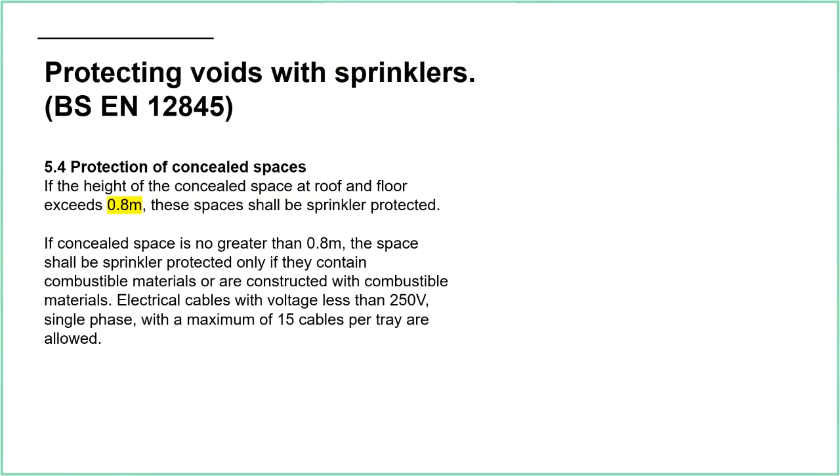So 0.8 meters, that is the magic number, and I've put that in bold here. 0.8 meters, 800 millimeters, that is the key number. It says, if the height of the concealed space at roof and floor exceeds 0.8 meters, these spaces shall be sprinkler protected. So that's a nice, easy, black and white option. If the void is greater than 800 millimeters, then sprinkler protection is required.

If the ceiling void is less than 800 millimeters, then sprinkler protection may be required. So it's important to get that distinction. It's not a case that less than 800 millimeters you don't have to sprinkler protect, but you may not, depending on a few factors. So we have no combustible materials, and that's a bit of a grey area. The standard does not tell you exactly what is a combustible material and what isn't, or whether a little bit of combustible material counts. We don't have that kind of detail.

I guess a fire engineer would be qualified to answer that, but somebody has got to make a decision as to whether or not there are combustible materials in the void. From a sprinkler contractor's point of view, I guess they would just put a note on the drawing: I've not put sprinklers into this void because it is 700 millimeters, but this is on the basis that there's no combustible material. And obviously the voids need to be constructed with non-combustible materials as well.

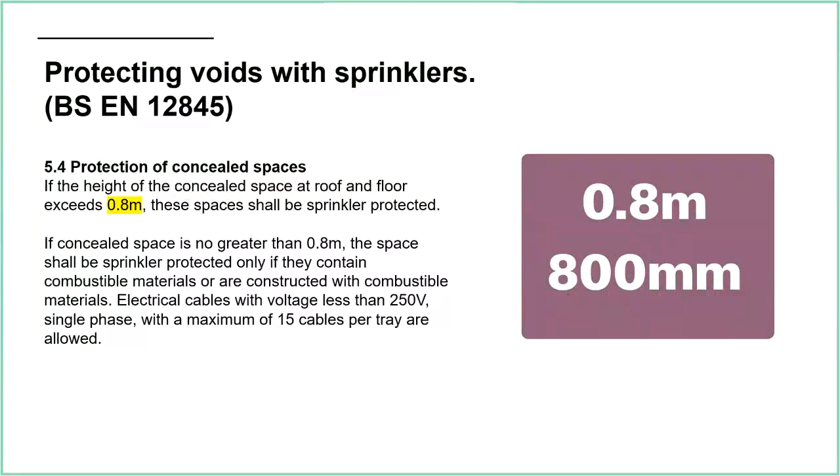There is a specific note here about electrical cables. We are allowed some cables within the void without sprinkler protection being required: less than 250 volts, single phase, maximum 15 cables per tray. So very specific there in terms of the number of cables per cable tray. But the main takeaway from this presentation is 0.8 meters, 800 millimeters. If the void is up to 800 millimeters, then sprinkler protection may be required. Anything over 800 millimeters, sprinkler protection is required.

A bit more information can be found in the technical bulletins. So again, I have explained this before. We have the British Standard, and then we have the technical bulletins, and those two documents added together make up what is commonly referred to as the LPC rules or the LPCB rules. So technical bulletin 230 talks about protection of roof spaces, floors and ceiling voids.

So the word voids does crop up here. And it is basically the same rule, so it's still 0.8 meters, but there's a little bit more detail that's been added here. So up to 0.8 meters shall be either sprinkler protected or compartmentalised by vertical cavity barriers, which shall enclose areas no greater than 250 square meters.

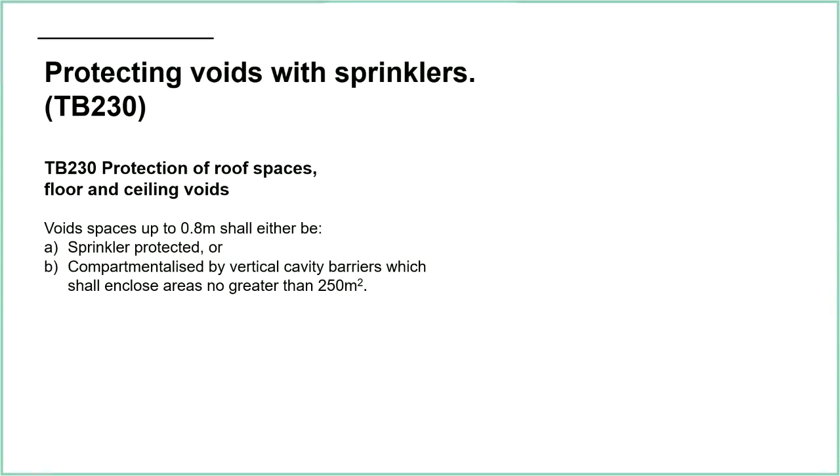So compartmentalisation is not actually mentioned in 5.4, although I think that it would be required under other regulations, non-sprinkler regulations in terms of construction. But here it's kind of spelt out in black and white. We need to compartmentalise it. Barriers no greater than 250.

What is a cavity barrier? Well, in the actual technical bulletin there is a little definition there. A separating element that resists the passage of flame, heat and fire gases for a period of 30 minutes. And there's a British Standard, which obviously gives you more information, BS 476-22. But yeah, it's a 30-minute fire barrier. So that's up to 0.8 meters.

Void greater than 0.8 meters shall be sprinkler protected. Again, similar kind of idea. And then where you have voids where some of it's more than and some of it's less than, again, there's a note here that deals with that. So either you sprinkler protect throughout, common sense. You can protect the lower depth and the higher depth, all sprinkler protected. Well, that will obviously work.

Or you can compartmentalise so that you've got some areas that are greater and some areas that are less. You don't need to protect the areas that are less, but you do need to protect the areas that are more. So again, that seems common sense to me to deal with that issue where you've got varying void depths.

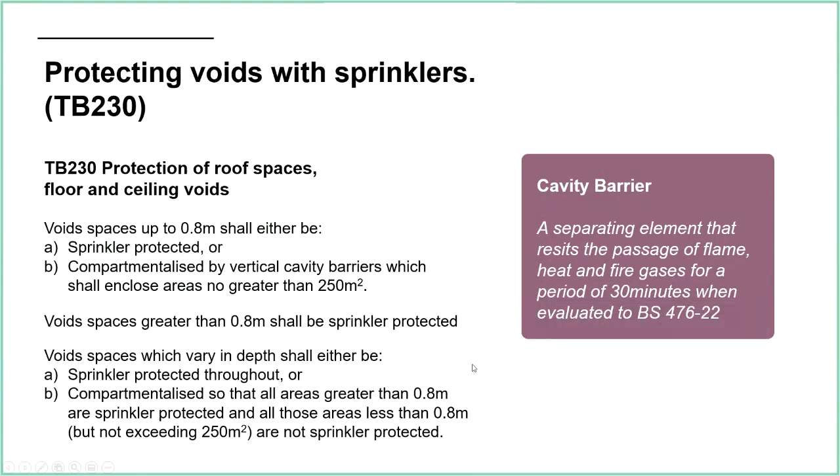Another bit here, continuing on 5.4. What's the actual sprinkler coverage? So the protection in the concealed space shall be light hazard when the main hazard is light hazard. I.e., if you've got a light hazard building and you have a ceiling void which is sprinkler protected, then the ceiling void protection shall also be light hazard. Light hazard is pretty rare actually these days, so much more likely to have ordinary hazard.

So the protection in the concealed space shall be OH1 in all other cases. And just a reminder, that means we want 5 millimeters per minute of discharge, a 72 square meter area of operation, and design spacing at a maximum of 12 square meters. So in terms of how many heads we require and how they're set out, it is all OH1.

So if our building as a whole might be OH3, then the void protection will be OH1. Okay, so it's a little bit less than what is down underneath the ceiling.

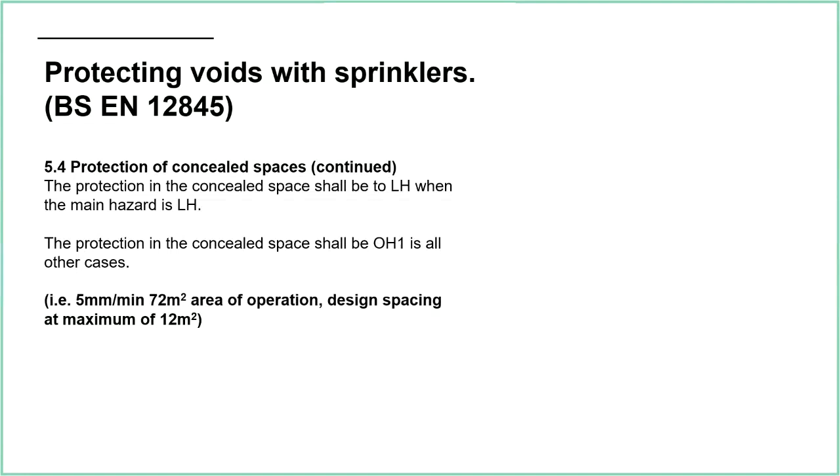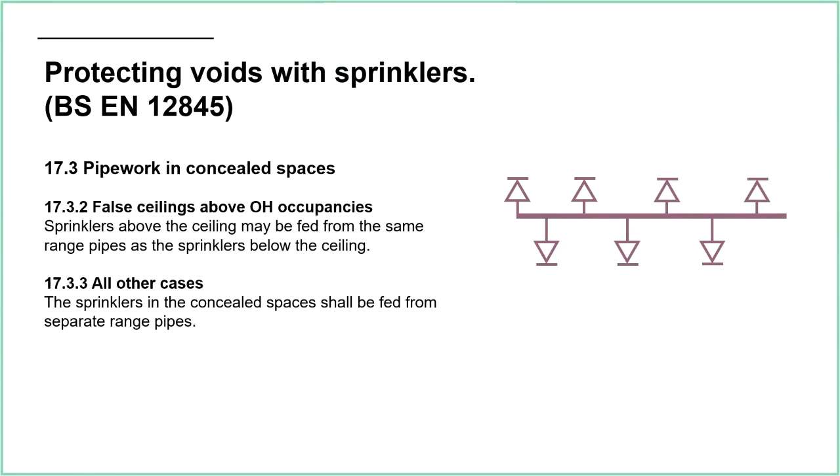A little bit more here in terms of the pipework. So this is 17.3 of 12845, where it says false ceilings above ordinary hazard occupancies may be fed from the same range pipe as the sprinklers below the ceiling. Sounds complicated, not really. That's what it looks like. So we're just using the same pipe, and we'll have heads going up to protect the void, and heads going down poking through the ceiling to give us protection below. But that is in ordinary hazard occupancies.

In all other cases, and I guess that means high hazard. I doubt that means light hazard, but it doesn't actually say. It shall be fed from separate range pipes. So again, it just looks a bit like that. We've now got two pipes going through, one exclusively for the void and one exclusively for the ceiling.

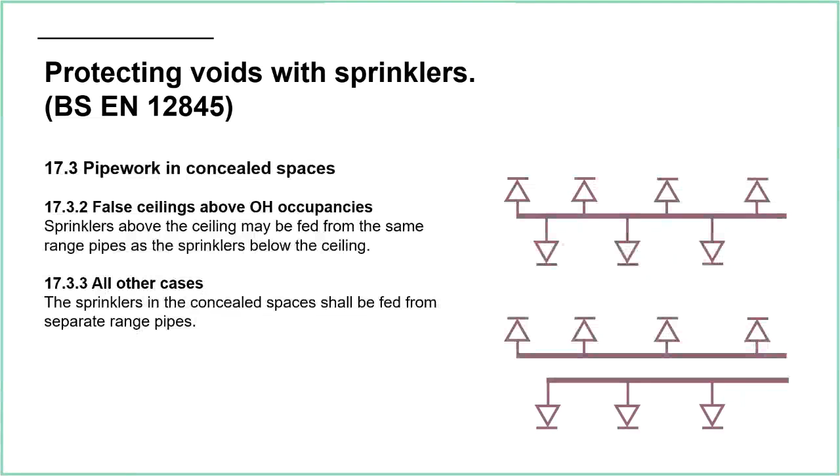So if you've got a suspended ceiling, it is important that all of the grid is filled. If you've got ceiling tiles that are damaged or missing, then they should actually be replaced so that we're separating the room from the void.

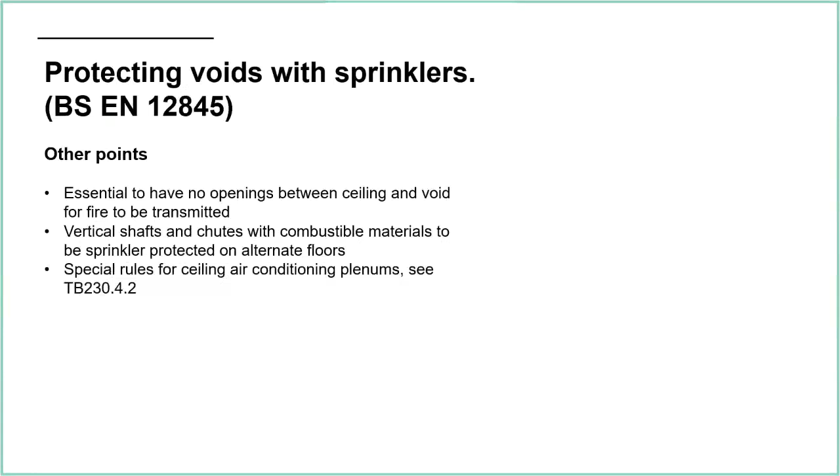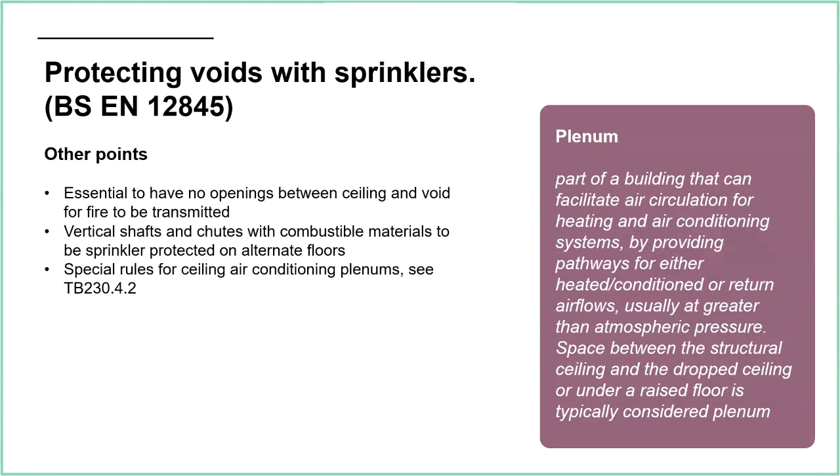There are special rules for ceiling air conditioning plenums. I think that's how you say it, plenums. And there's a bit of information there in Technical Bulletin 230.4.2. What's a plenum? So a plenum is where you're using the void as your heat or air conditioning. So normally with heating and air conditioning, you have a duct that's running through the void, and that is at high pressure or low pressure to pull the air through and mix the air through the room. But a plenum means that you're actually using the whole of the void. So it's like the whole of the void is acting like a giant duct to move air through.

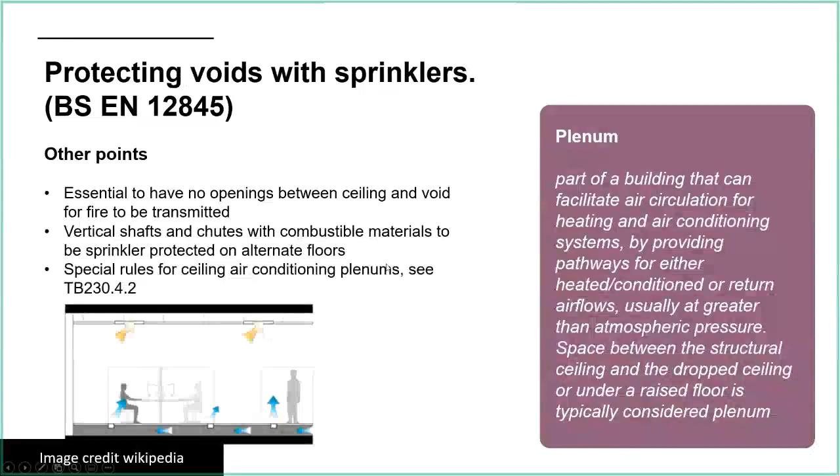Sprinkler protection is not required in ceiling voids. Oh yeah, sorry, I've got ahead of myself there. So now I'm talking about residential buildings under 16925 and 9251. So sprinkler protection is not required in ceiling voids under residential and domestic buildings. Loft voids are included in this as long as they are uninhabited and suitably compartmentalised. So yeah, we don't do void protection under residential and domestic rules, and that includes the new 9251, which I believe is due out this year. I had a look at the draft document, and again, that doesn't mention it either.

Right, a little bit now about alternative ceilings, just in the last few minutes. So there's a special note about skylights. Again, I'm not going to go into lots of detail. Skylights, generally speaking, won't be sprinkler protected, but large or unusual skylights may require it. I had a look at the rules, and I don't know much about skylights, but I decided from reading the description that the majority of skylights wouldn't trigger this additional rule.

Canopies. So canopies would be sprinkler protected, often with a tail end dry system, because obviously they're going to be exposed to the low temperatures. So there's rules for that. In Technical Bulletin 221, which is all about schools, there are some more detailed rules on canopies, because I think schools tend to go for canopies in a big way. Lunchtime, break time. They want to get the kids out of the building, but they need somewhere to stand and play where it's dry. So they like canopies at school. So there's a bit more detail in there if you're interested in that. And also TB 206.4.3 will also tell you more about canopies.

Finally, I think, if I remember rightly, talking about suspended open cell ceilings. IKEA seems to be a big fan of these. Whenever I'm wandering around in IKEA, they have these suspended open cell ceilings, which means that generally at eye level, you just see a ceiling. You don't notice what's above, but obviously if you stop and look up, as people like me will do, you can see all of their sprinkler protection and all of the services that are connected in the void

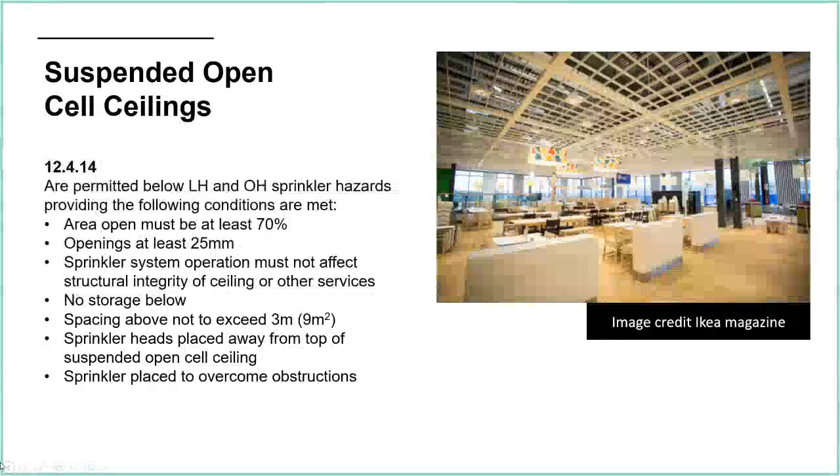space above. So a suspended open cell ceiling does not require sprinkler protection below as long as these conditions are met. So it's only for light hazard and ordinary hazard. The open area must be at least 70%. Again, makes sense. So the suspended open cell ceiling must be 70% nothing, if you know what I mean. The openings must be a certain size.

There was a comment here that the operation of the sprinkler system must not affect structural integrity of the ceiling or other services, which again is a bit of an obvious thing to say, but when the sprinklers operate, we don't want the ceiling to fall down or other services to fall off. That's going to injure people down below. So again, that seemed a pretty obvious thing to say. No storage below is allowed, and then the spacing above is not to exceed 3 meters in any direction, i.e. 9 square meters is maximum.

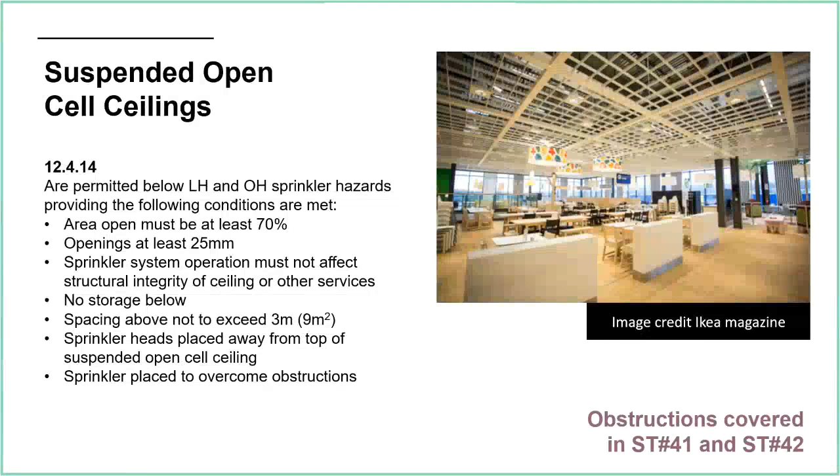Sprinkler heads placed away from the top of the suspended cell ceiling. So again, we don't want to get too close to it. We need a little bit of distance in order for the water to be discharged correctly. And sprinklers placed to overcome obstructions. Again, any kind of ducts, etc., would need to be protected properly. And again, I'm going to cover those in a later sprinkler talk.